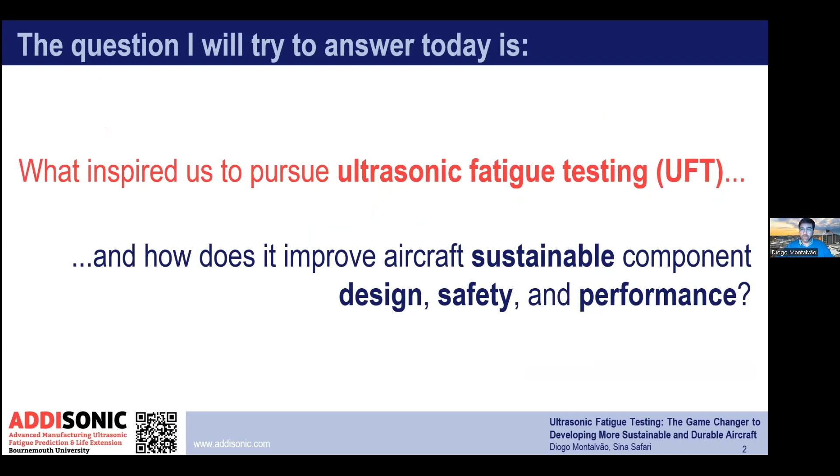So a little bit about me first. I think it's important that you know who I am. My name is Diogo Montalvão, as I said, and I work for Bournemouth University. I'm going to change here the pointer to a laser pointer to help me navigate the slides, as I don't have the same engagement with them as in a face-to-face session. I'm a fellow of the Institution of Mechanical Engineers and a fellow of the Institution of Engineering Designers. And I started my career in Portugal in a small company called Joca.

No one knows what it is, probably. I started there as a draftsman, doing engineering drawings, technical engineering drawings for hydraulic lifts basically. Then I went to Adtranz, which was bought by Bombardier Transportation, but I was working in the rolling stock industry, basically in maintenance of rail vehicles, reliability-centered maintenance of rail vehicles.

I was then invited to go to academia from a polytechnic, a small polytechnic in Portugal. And it was great because that gave me access to something I'm quite passionate about, which is airplanes. I did lots of consultancy work for the aeronautical industry, and I'm going to show in the next slide some of the stuff I did back then when I was at the Polytechnic.

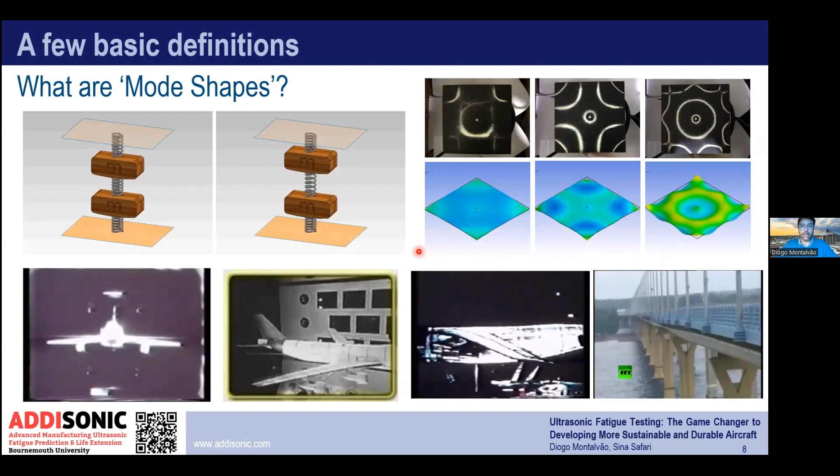So this is mode shapes. And now on the next one I've got a video of myself, which is quite embarrassing. Is it going to work? Why is it not? Is it because of the pointer? Let me see if I remove the pointer. Let's see what it shows.

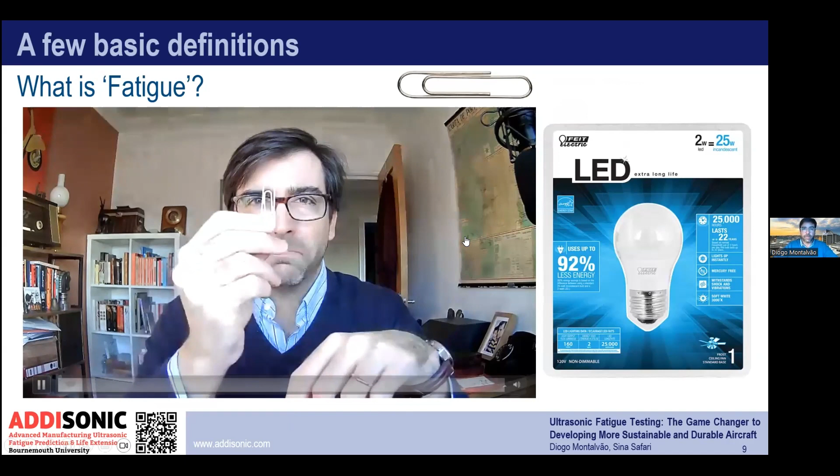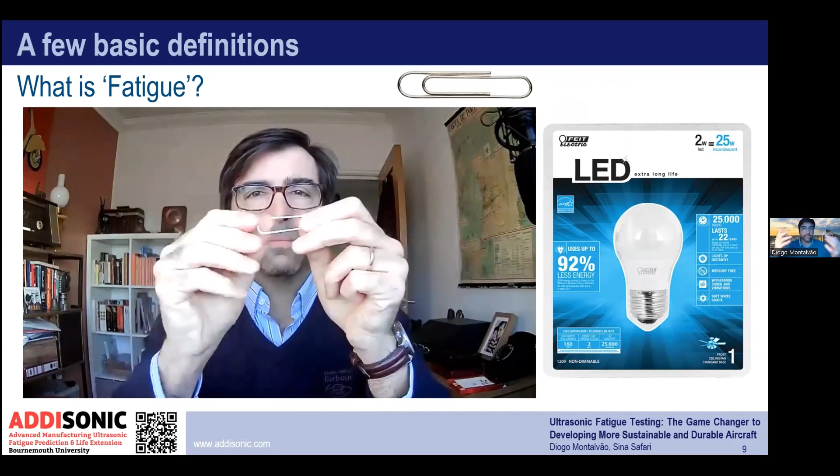So in that video I applied cyclic loading to a paper clip. You all probably know this already, but for those not familiar with the subject - for example, if you're from a background in telecommunications or electronics - you might not know what fatigue is. This is fatigue, specifically low cycle fatigue, what I just showed. It's in the plastic domain, but it's still fatigue. Information about fatigue is important, for example, because of planned obsolescence. Take a light bulb - we all know what that is, but they're designed to last, say, 25,000 hours or a certain number of on-off clicks. It will then eventually fail after that amount of operation. That's what fatigue is, and we use this information to design products for a given lifespan.

Now that we're done with the basic definitions - and again, apologies if they were too basic - let's move to the introduction to the topic. First, I'll apologize in advance if I use acronyms as if they're real words. There are two I might use a lot but will try to avoid: VHCF, meaning very high cycle fatigue, and UFT, meaning ultrasonic fatigue testing. The two are closely related because it's very difficult to test up to the very high cycle fatigue regime without ultrasonic fatigue testing.

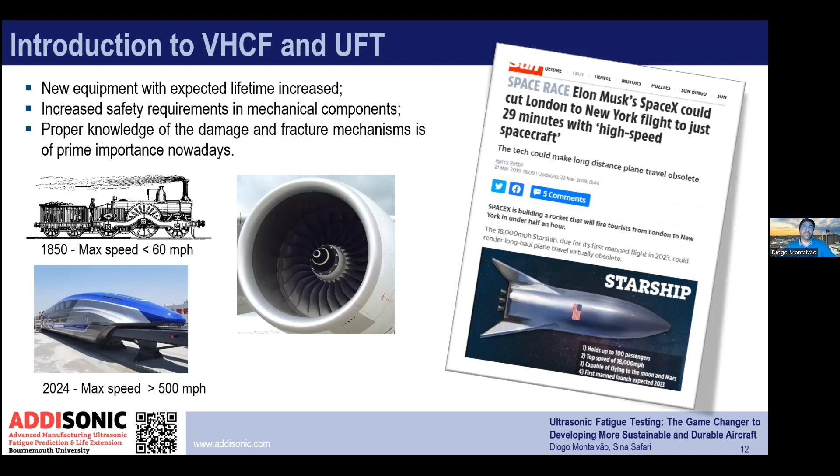And then we have Elon Musk's somewhat megalomaniac - maybe not, maybe yes - ideas of launching space rockets or spacecraft to travel from New York to London in just 29 minutes. This will be a lot more demanding on structures, and because of increased speed, we'll also have increased frequencies involved in the way loads change in a structure.

For those unfamiliar with the topic, if you bend a paper clip like this, each time I repeat this motion, that's one cycle. So I repeat it - 1, 2, 3 - and count the number of cycles until it breaks. As is obvious, the higher the stress amplitude, the lower the number of cycles to failure.

In the past, we used to say there was an endurance limit. If you know the books from, say, Peter Childs or Shigley, they would speak about designing for fatigue life - from 10 to the power 6 or 10 to the power 7, we consider there to be infinite life. However, that's an approximation, and there are factors of safety and correction factors in the design. But the point is there is no such thing, and that is now known as the fatigue limit - there is no such thing as infinite life.

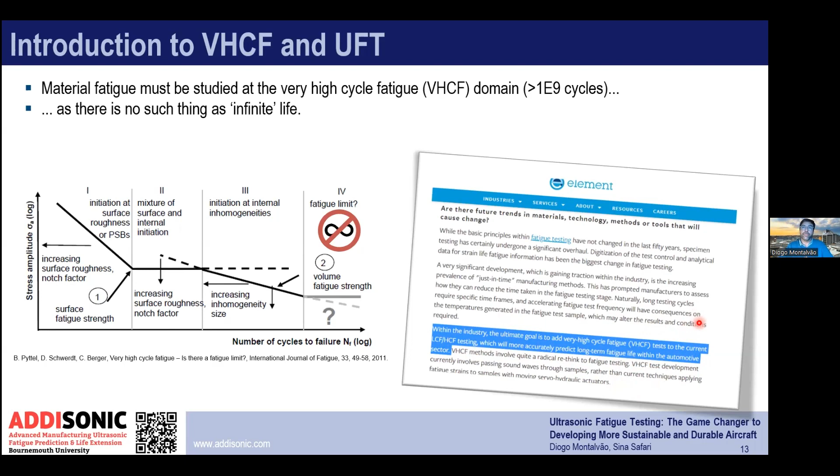This is actually from the automotive sector - I'm noticing the word automotive now, which is a bit annoying - but what I wanted to highlight is that within the industry, the ultimate goal is to add very high cycle fatigue tests to the current LCF (low cycle fatigue) / HCF (high cycle fatigue) testing, which will more accurately predict long-term fatigue life within the automotive sector and other sectors as well. So basically what we want to do is include this in the mix of testing we already use.

Other interesting things - this was from a PhD student I had, an excellent PhD student, who was working with other colleagues on a very exciting project on electromagnetic treatments on different metal alloys, including aluminium and nickel titanium. What he found was that we can improve or enhance some properties, namely resistance to cavitation erosion, resistance to wear, and hardness. Here we are comparing two materials: nickel aluminium bronze and a 2014 T6 aluminium alloy. There were also hints that with these treatments we could improve the fatigue lifetime, even when the parts are being serviced, so after service.

So they were operating, we apply the treatment, and then that brings back the lifetime. If we think in reliability terms, it's like reducing the failure rate, the chances to fail.

Now the problem was that we couldn't really determine that because there was just no time. It wasn't feasible to do the tests in a lab because a single specimen could take months to complete. So ultrasonic fatigue testing responds to that because it's accelerated testing.

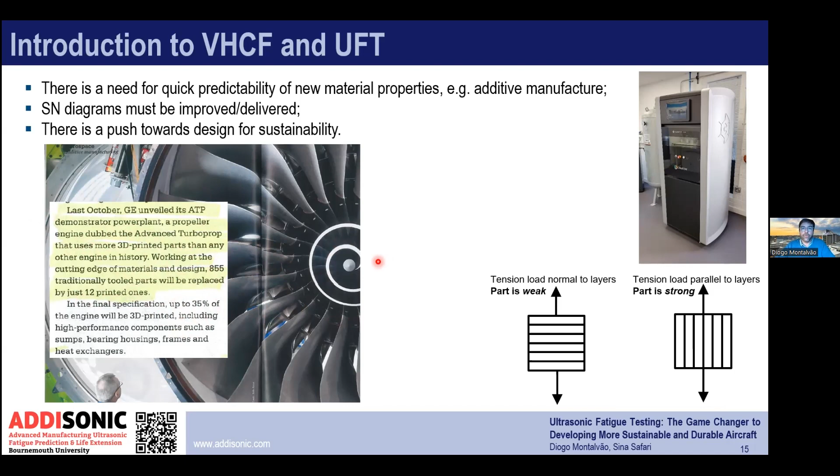So what is ultrasonic fatigue testing after all? Contrary to normal conventional fatigue testing, where you use a rotating fatigue machine that we clamp in both locations, or a universal testing machine where we apply tensile or compressive force, this one is a bit different. We use an actuator, which is actually something used for welding, and then what is called a booster.

But this is all based on reproducing free vibration working at natural frequency. So all these components are vibrating at their natural frequency - they're all designed to vibrate at natural frequency. And the connection points, like the one between the horn and the booster, and between the horn and the specimen, are vibrating in free-free conditions. That's the principle behind ultrasonic fatigue testing.

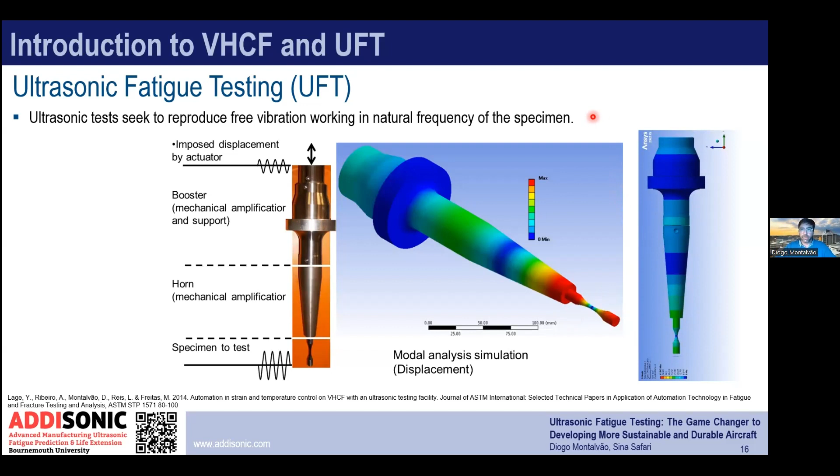There's a reason for that - the noise can be quite annoying. If we go below 20 kilohertz, we will hear it. Even myself, my hearing is now probably a bit damaged up to 17, 18 kilohertz - above that I don't hear a thing. But if we go below, it might be quite annoying, upsetting and disturbing. If we go above, we have problems with scalability of the specimens. So 20 kilohertz has been accepted as the standard frequency, and that's why it's 20 kilohertz.

This is the control diagram.

This is the first machine I developed, which is in the University of Lisbon, or I helped developing it. It was not just myself. I did all the control of that machine, where you can see the piezoelectric actuator, specimen over there, and an infrared thermometer. We were using some fans to cool down the specimen.

We used this cheap National Instruments data acquisition and control device. So we get the temperature and displacement measurement from a laser, a Polytec laser Doppler vibrometer. And we then do the control in LabVIEW. We can also obtain thermographic images.

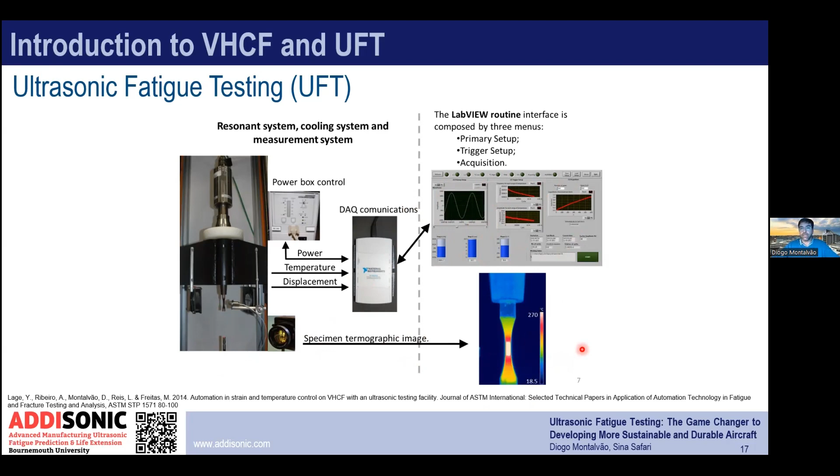This is used to tell us that if the temperature is increasing, then that's a sign that the stress is increasing as well. This technique generates a lot of heat, which is one of the downsides. But one advantage is if we compare a universal hydraulic test machine from Instron, that typically works between 1 to 50 hertz, and an ultrasonic fatigue testing machine that works at 20 kilohertz, you can see you don't have anything on this end, whereas here you need 2 clamps.

If we do the math, considering 30 hertz in this case, I placed a rotating bending, but it could be anything, compared to 20 kilohertz, to reach very high cycle fatigue regime, it takes us, in theory, half a day on the ultrasonic fatigue testing machine, and 1 year in rotating bending at 30 hertz for a single specimen working 24/7. This is not exactly true for the ultrasonic because of the heating. We need to stop, so it might take us a few days, maybe 3 or 4 days, until we get the crack.

But it still is a great improvement compared to a conventional test method. And if we wanted to reach 10 to the power of 10 cycles, it would take us 1 week on 20 kilohertz, working 24/7 non-stop. That would be 10 years basically, what we would get, because it's tenfolded the number of cycles.

So this opens up an opportunity to get data for very high cycle fatigue regime. Or if you want to look at it another way, if you're not interested in 10 to the power of 9 but in 10 to the power of 8 number of cycles, well, we can do that in just a couple of hours compared to months in rotating bending at 30 hertz. So you can get data very quickly in our testing.

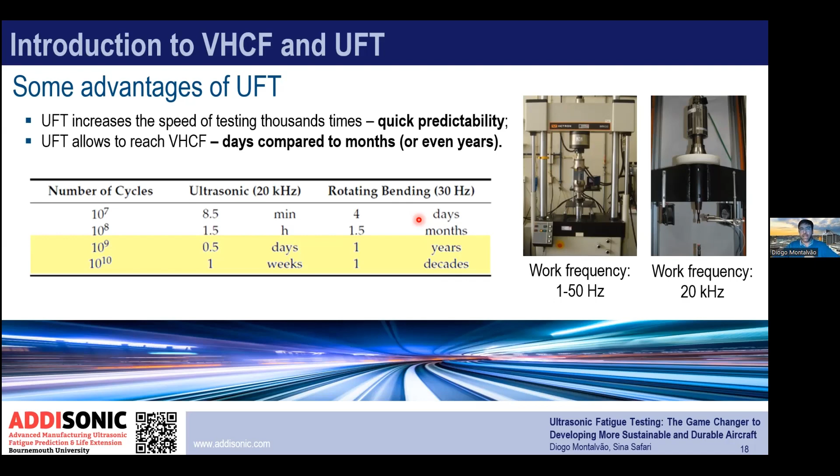Below 10 to the power 6, we don't want to use the ultrasonic fatigue testing machine, but then the conventional test methods are already giving us reasonable times to get the data. So that's fine. This is useful for quick predictability at high cycle fatigue, very high cycle fatigue. There are some challenges, I think.

Sina is going to talk about them. One of them is strain rate. You might be already thinking about that. Some materials are frequency dependent. I think he's going to touch base on that.

Temperature control, I already mentioned that, and it also has an effect in the behavior of the materials. The problem is, because of damping, when we start the measurement, the temperature will increase, so we need to stop. We need to specify an upper limit, then cool down the specimen and start again, and stop, and so on and so forth. So it's not continuous. This also brings other questions: will that have an influence on the results? Because we all know that when we turn on and off something in control systems, there is an overshoot. Well, it's a price to pay for the technique.

So obviously there are limitations, we don't want to hide them. Data acquisition, that's no longer really a limitation or challenge. I left it there because this technique exists since the 60s. However, because in the 60s there was no capacity to acquire data, it kind of was waiting for data acquisition technology to evolve. And so in the last 10 to 20 years, this is when the community started getting interest in ultrasonic fatigue testing.

Low cycle fatigue, well, that's a challenge, but we can do it in conventional testing, that's not a problem. Scalability as well, and how it compares, because of frequency-dependent materials, with normal testing. This is taken from a paper where they could see there were some differences between the SN curves obtained in ultrasonic fatigue testing and obtained in rotary bending. But there are ways of calibrating the two curves, and from the ultrasonic data, converting it into the equivalent lower speed version. So that's something interesting to know. Some materials are more frequency dependent than others.

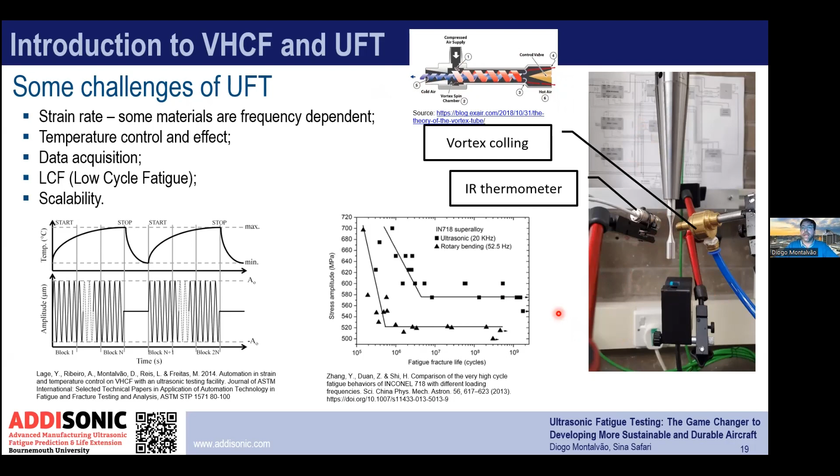And this is a laser that measures the displacement at the tip of the specimen so that we can relate it to the stress at the center. But we've got digital image correlation, which Sina is going to talk about, that allows us to measure at very high speed the actual stress in the specimen.

Other advantages of ultrasonic fatigue testing is that it is highly versatile. Because it is modal-based, we can do multi-axial testing with a single actuator, as long as the specimen is designed to allow us that. This is an in-plane biaxial specimen.

I claim to be the first person in the world to basically tune a specimen that exists. So I picked up a specimen that existed for conventional testing, and I tuned it to use in an ultrasonic fatigue testing machine.

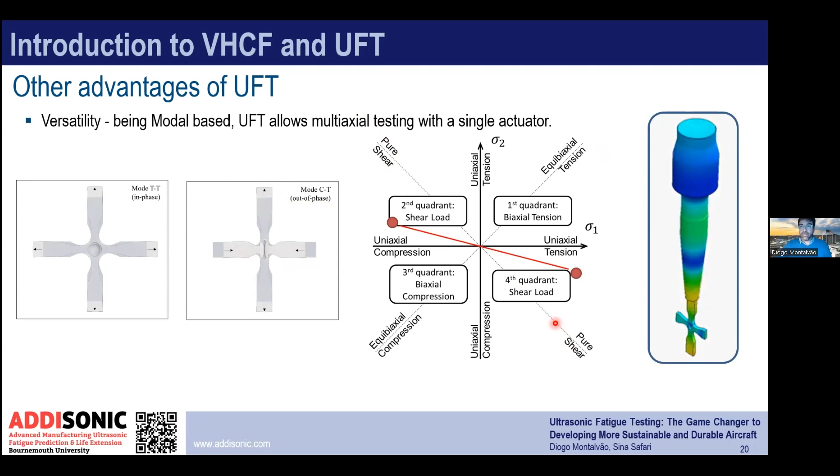And we can do loads of stuff with the same machine. We can have in-phase, or pure equibiaxial testing. We can have out-of-phase mode shape, so when this arm is in compression, the other is in tension and vice versa, which is basically pure shear. We can also get different biaxiality ratios, which is what we're showing in that picture. So I thought it would be interesting to talk a little bit about biaxial fatigue so I can explain what this is.

This is relevant because multi-axial stresses are what actually occur in real structures. There's no such thing as purely uniaxial stress - well, that's not entirely true, we might have uniaxial stress. But even a uniaxial specimen is biaxial if you think about it, because of the Poisson ratio. So if I have steel, for example, and the stress in one direction is, say, 10, the stress in the other direction will be around 3 megapascals or whatever the unit is. So biaxial stresses are really what's happening in real life.

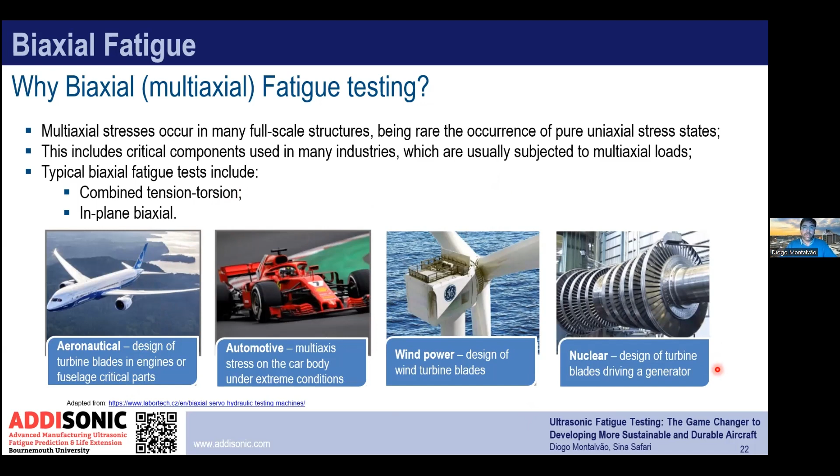And this includes critical components used in many industries. Here I've got examples that I got from elsewhere - I've got the link there. We have many different examples where this could be critical, especially in turbine blades, nuclear generators, and even fusion reactors. So this could be quite relevant.

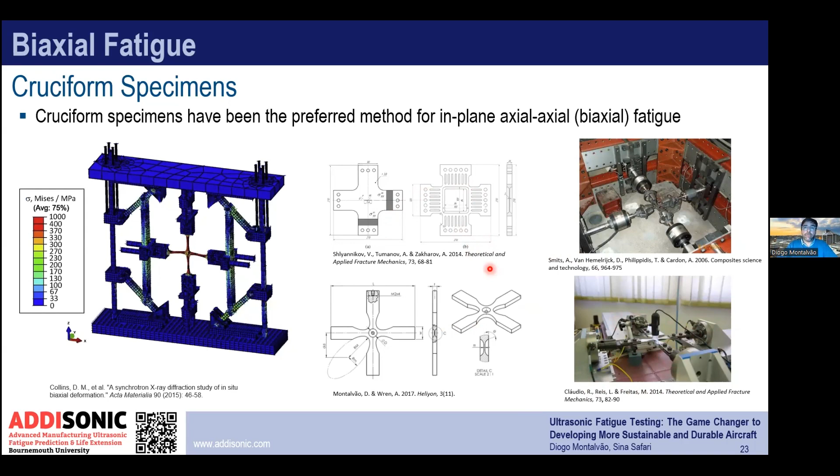And then we have different types of specimens here in the middle. Now, the problem with that is complexity, but with the ultrasonic fatigue testing machine - the same one used for uniaxial specimens - we can still do the biaxial ones as well.

So here we've got cruciform specimens, again the same picture I showed you earlier. And here's the schematic of the machine again - piezoelectric actuator at the top, the booster, the horn, and then the specimen. But because the specimen is connected through an antinode of vibration of that particular mode shape, it will vibrate with that mode shape. If you know about vibration theory, this should make sense. So the coupling is at the correct coordinates, and I will get the mode shape I designed for, as long as this is an antinode of vibration.

We can change the arm's length, by the way, and get different biaxiality ratios between the two axes. And the good thing is that only one actuator is needed.

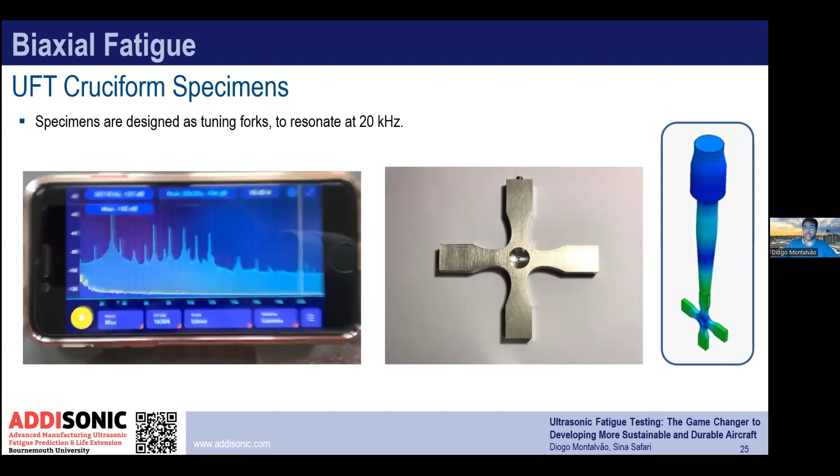The specimen was designed in a computer using finite element analysis, then we made it using subtractive manufacturing in a CNC machine. This one is aluminum, and we tested it to check if it was resonating at 20 kilohertz, and then we can place it in the machine safely and test it to fatigue.

There are obviously some problems, and here is a specimen that didn't work really well - we had heating being generated at the top, and some problems with the mode shapes, with a spurious peak over there. So we need to make adjustments to the design because we want a pure harmonic signal. Once that's done, we can see we're getting good data.

The maximum stress is at the center, and in this case the fracture was around 45 degrees, which for this pure shear specimen is exactly what we expect to get from theory.

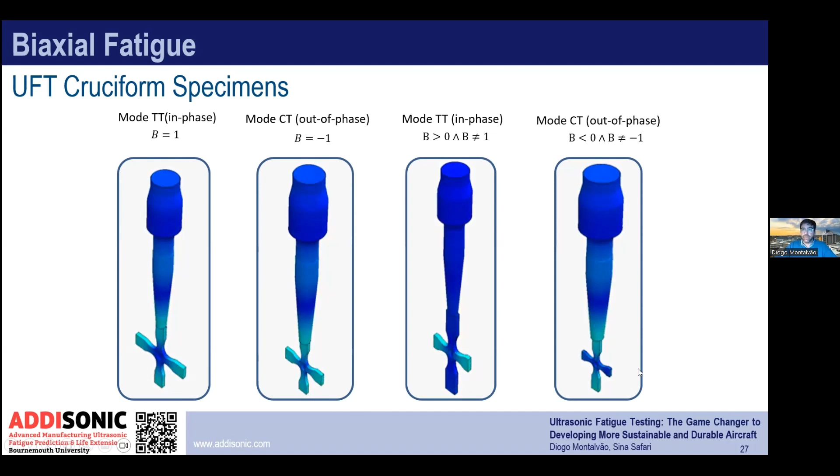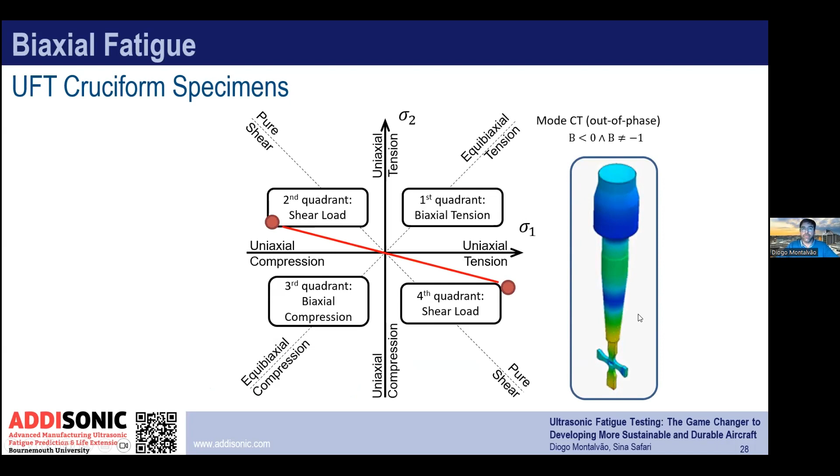So again, this is basically what I showed earlier, so this is maybe a repetition of the two stresses. In this case, we would get somewhere over there - that's more or less what we've got.

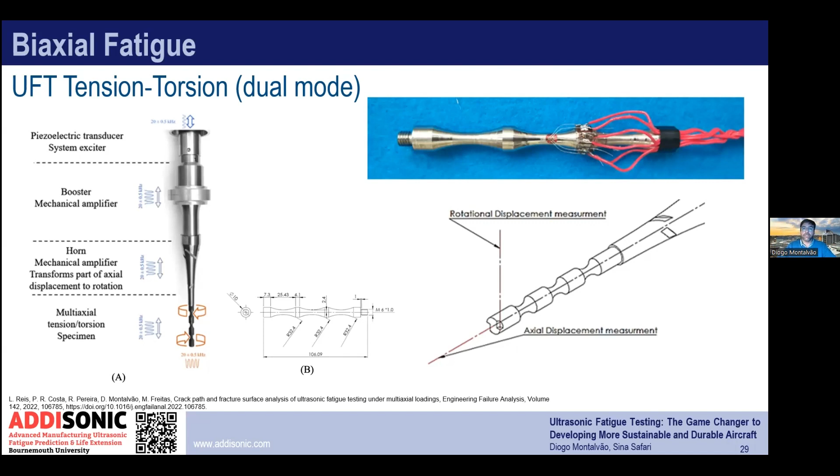But it has interesting applications, like gears - bevel gears, or helical springs. So there are many different types of applications where this could be interesting to test.

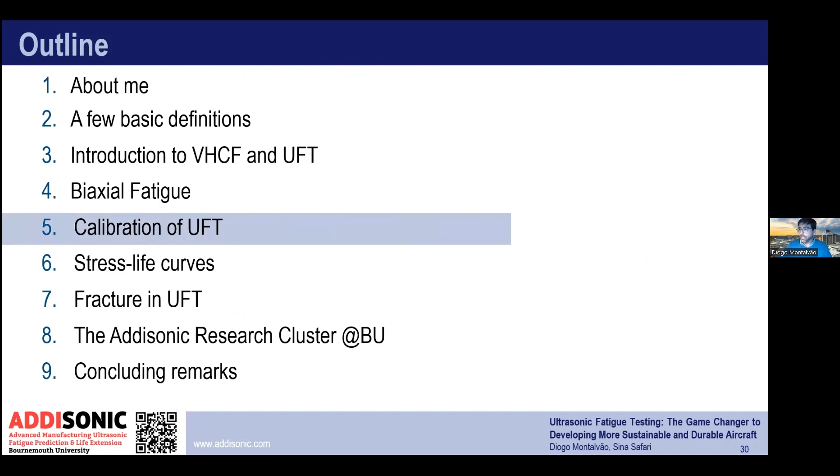So we reached the stage where we're going to talk a little bit about the calibration of our ultrasonic fatigue testing machine at Bournemouth University in the ADDISONIC. Sina, this is where you can say a few words and let me know when to change the slides.

Hello everyone, my name is Sina Safari. I'm a postdoctoral researcher working with Diogo in this interesting project in the ADDISONIC research cluster. I'm going to briefly describe how we are doing the test in the lab and how we collect the data and process them.

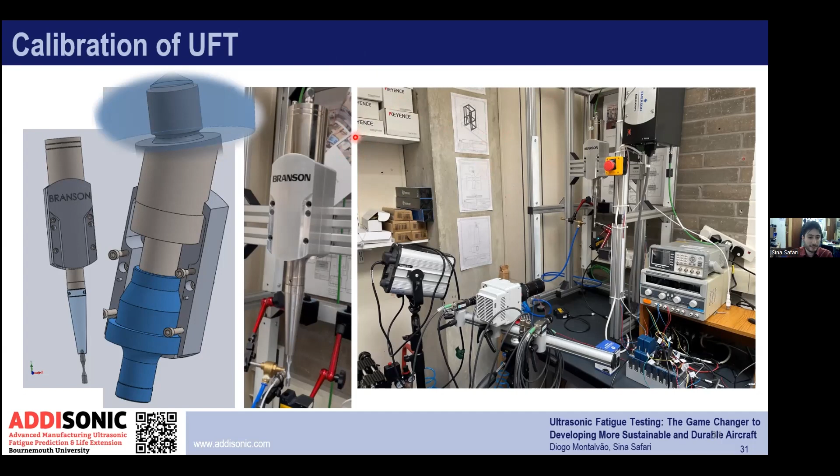Basically in that high frequency range, if we have friction, which is a nonlinearity, it can cause some mode shapes. But we could kind of control them properly to do the tests.

So this is the setup we have in the lab, and I'm in the same lab at the moment. In this slide, I'm going to talk about some standard procedure to do the calibration of the machine and how we can extract the data.

At the moment, I think there is one standard, a Japanese standard, which is very brief and the first one in the world, talking about ultrasonic fatigue testing, specifically on metallic materials.

So there are a couple of steps to go through. First of all, we need to calibrate and validate the laser reading at the tip of the specimen. Then we should also calibrate and validate if the DIC system, digital image correlation system, is working.

After we make sure they are showing correct results, we need to make sure the intended mode shape is excited, which means, as you can see in this animation, we need to make sure that the top plate of the specimen and the one down there are working synchronously and as designed, intended.

So we can put another laser, or we can use the DIC system to just observe the vibration mode, and we can make sure it's exactly what's happening in the simulation - that it's happening in the physical world. So that's the second step.

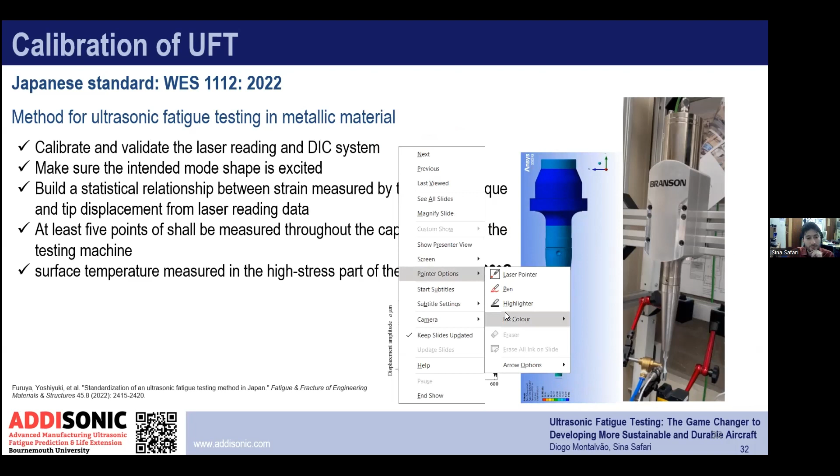In the third step, we can build a statistical relationship between the strain measured - what I mean by strain, we have this neck in the middle of the specimen, which we measure using the DIC system. And then using the laser, we measure the tip displacement.

So there is a relationship, because we are assuming the specimen is in the linear regime - there is a linear relationship between the tip displacement and the strain in the middle of the specimen. That's one of the steps we need to carry out to find the relationship between the laser reading at the tip and the strain in the middle section of the specimen.

At least we need 5 points, which I'm going to show in the next slide hopefully, to do this process, measured throughout the capacity range of the testing machine.

And then finally, we need to always control the surface temperature in the high stress part of the specimen. As specified by the Japanese standard, it should be lower than 30 centigrade. It's just a guideline, so sometimes we can go over it, depending on the material as well. This figure here is just showing how the test is working.

We just excite the machine and it starts vibrating at 20 kHz. Then the cooling system starts and the machine stops vibrating. As you can see, we have a very quick free decay response, and the vibration dies down and the cooling system works, and then after cooling it just starts again.

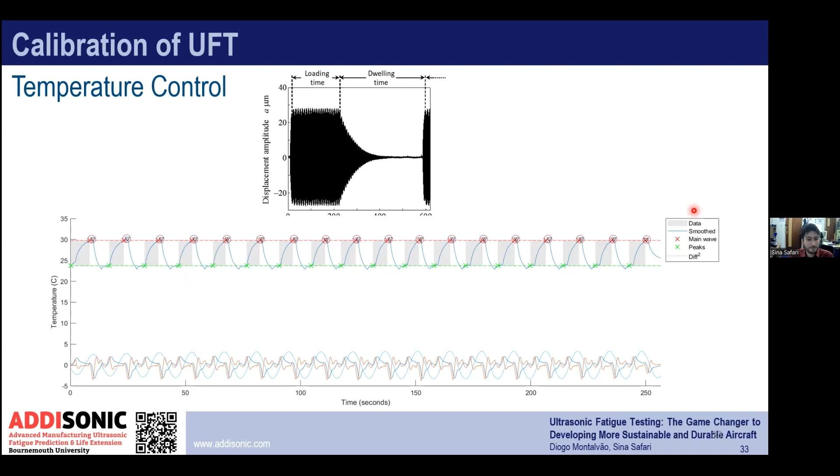So from the temperature also we can calculate the number of cycles. That might not be quite reliable, but it's a good approximation. We have a real-time counting system in the control part of the testing machine that counts the number of cycles for us. So in the next slide, we move on.

This slide shows exactly how we measure the strain in the middle section of the specimen using the DIC system. So if we play that and also play the one at the bottom, as you can see, we have the simulation of vibration, and that shows the stress, or strain, in the middle. Both of them should be similar.

We can compare them because it's in the linear regime. So it shows the strain, for example, in the middle of the specimen using simulation, and what we are observing in the experiment using the DIC system. The wave down there, the cyclic motion, shows us the strain in the middle section. This is how we use the simulation and experimental data to calibrate, to make sure the machine is working as designed, and also to calibrate the FE model based on what we observe in the experiment for later stages.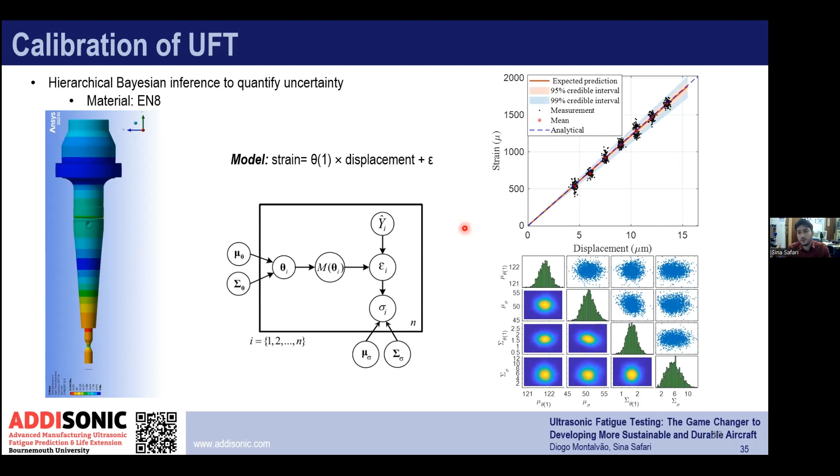So we used a hierarchy of Bayesian inference. I'm not going to elaborate too much on the algorithm, but it just means that if you have multiple data sets, not just one, you can use a hierarchy of regression to find out the uncertainty in the data and distribute it. That's the whole process.

So when we built that relationship, now we have the tip displacement and strain. Now we can go and find out the number of cycles for that strain or stress level. For example, I'm going to excite this structure, or the machine, at a tip displacement of 10 microns. That represents, based on this bottom left graph, a strain higher than 1,000 microstrain.

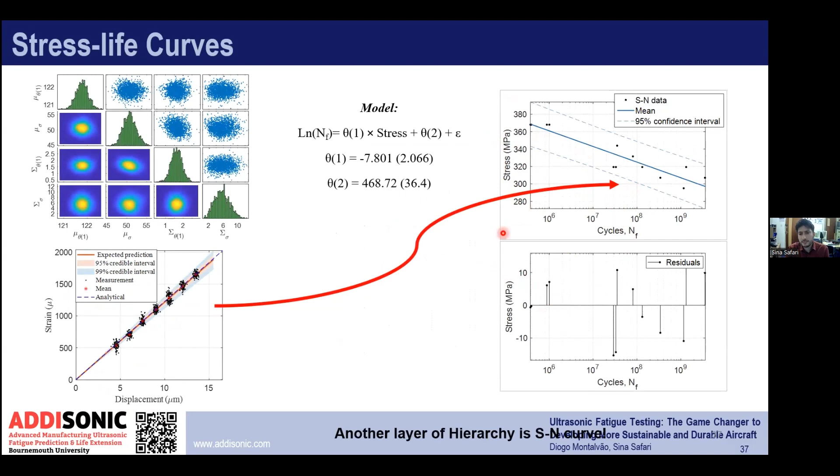And then I can build the relationship between the strain and the number of cycles. So these are the data points based on recommendation. 12 specimens we just broke for the very high cycle regime, and we had some data for the low cycle regime as well.

As you can see, we can fit these data again using regression or a simple model, and we can find out the trend with some confidence interval. Take into account that this very high cycle fatigue regime with normal machines will take, as Diogo mentioned, up to 1 billion cycles. It will take 1 year to do just one specimen. But with this machine, it's achievable with just 12 specimens. We can find out these data points and build this stress-cycle, number-cycle curve.

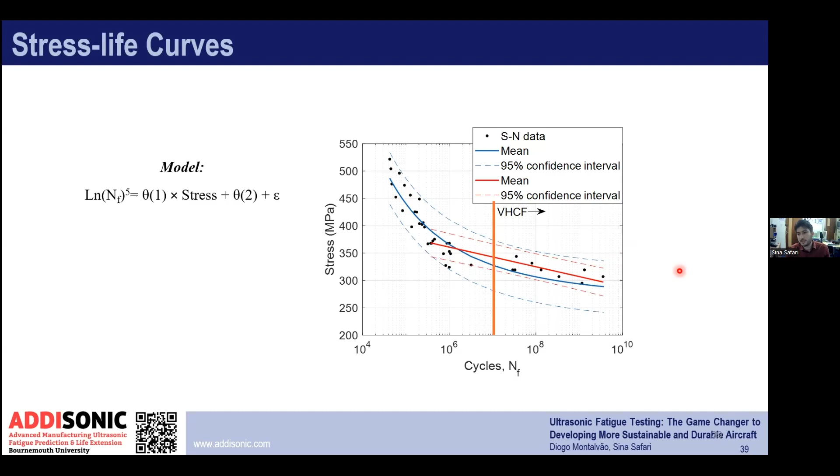If we move on to the next slide, this again shows different fitting methods for different models we can use. In the very high cycle fatigue regime, I use the linear model, or I put the whole data together and use the nonlinear model. There is a reason for this: some literature proposes that if we continue the regime we observe in the low cycle to the high cycle and very high cycle, we will not get a good estimation of the S-N curve.

So this graph shows 3 regimes. Regime 1 is low cycle fatigue, and as you can see in regime 1 we have elastoplastic behavior, with dominant plasticity there. In the second regime, the transition between low and high cycle regime, we have a little bit of plasticity involved in the microstructure. And in the third regime, the very high cycle fatigue regime, the system is almost linear.

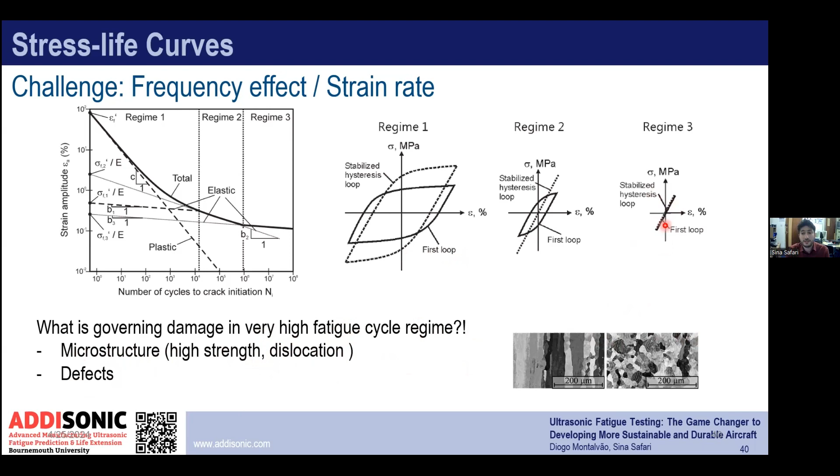So the question of where the damage is coming from actually comes from the microstructure. What is governing the damage in the very high cycle regime, I would like to answer, is the microstructure. If there is a very small microstructure defect, or after many cycles, if there is microplasticity developing in some region of the structure, in this very high cycle fatigue regime the microstructure is very important, and this is one of the challenges that should be addressed.

Okay, I think that was my part, Diogo. Thank you very much, Sina. I'm conscious of time, I need to speed up a little bit.

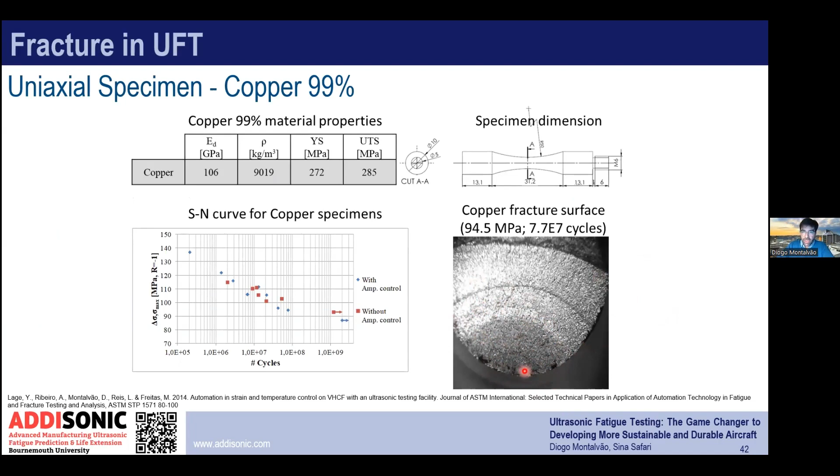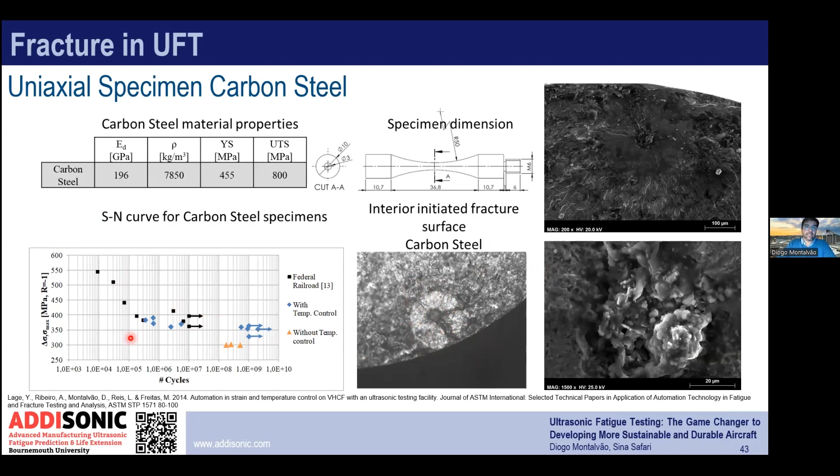You already covered most of the stuff in terms of fracture, so I won't go into details. These are results from past tests we did in copper, and we can see the typical beach marks in fatigue in a uniaxial specimen, with the crack developed from a surface defect. However, with steel, coming back to what Sina was saying about the microstructure, at very high cycle fatigue regime the crack nucleates from inclusions or defects inside instead of surface scratches, in what we call a fisheye pattern. This is very typical in a steel specimen, but the data is still comparable to the carbon steel specimen.

In biaxial fatigue, without going into much detail, there are 3 types of modes in fracture mechanics. What we see is that with equibiaxial loading, stretching from 2 orthogonal directions, we get mode 1 striations, meaning we're getting opening as expected, although the angle wasn't quite right at the center. We can see it very well, it's 53 degrees, not too bad, we were looking for 45 degrees.

In pure shear, we got 40 degrees at the center of the fracture, and we have shear marks, which is mode 2 as expected, and then there is a bifurcation, which has been observed by other researchers before in aluminium.

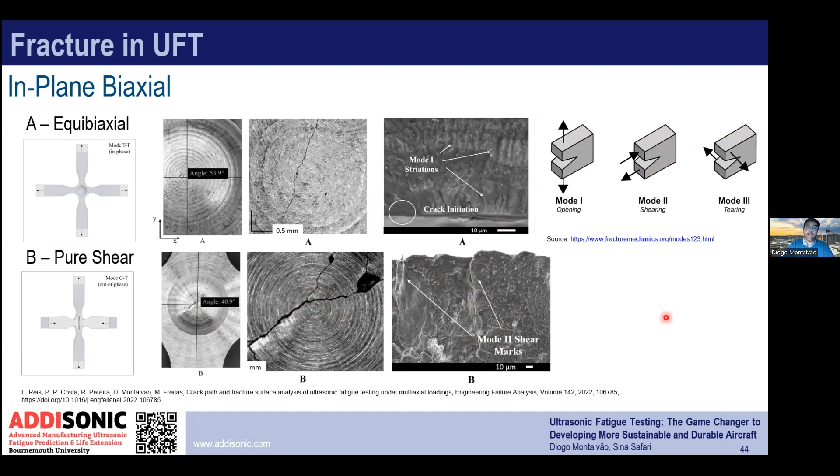So just to finalize a bit about the ADDISONIC Research Cluster, it's funded by Research England with at the moment 265,000 plus pounds, and has a mission to contribute to reducing global waste, enhance the optimization of engineering systems by helping engineers incorporate advanced materials tested under ultrasonic fatigue, for quick and reliable predictability of properties to extend their lives and enhance design for manufacturing.

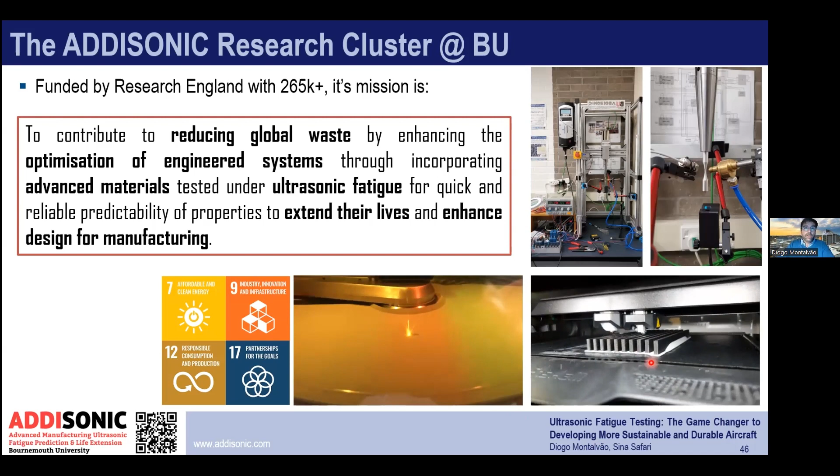These videos show 3D printing at the university, of metals and carbon fiber specimens as well. So I had a video here.

I'm not sure this is going to work, yeah, I'm conscious of time, I'm going to probably skip this.

This was just to show the digital image correlation showing the deformation of the specimen, and that's the camera over there, then comparing with the finite element model.

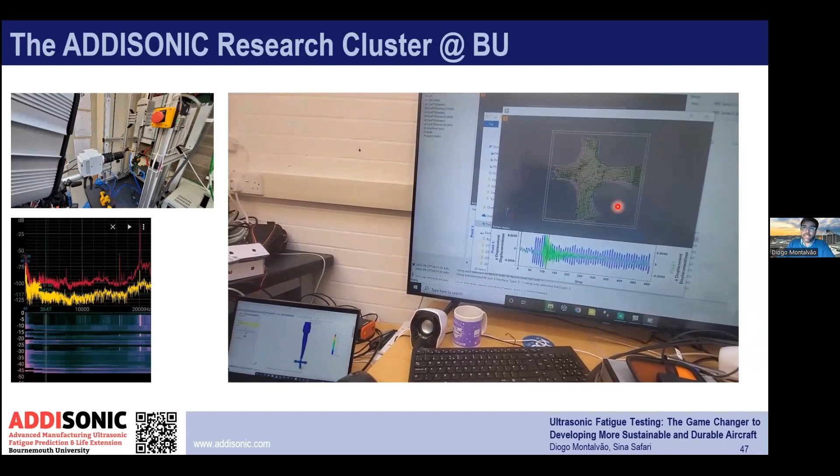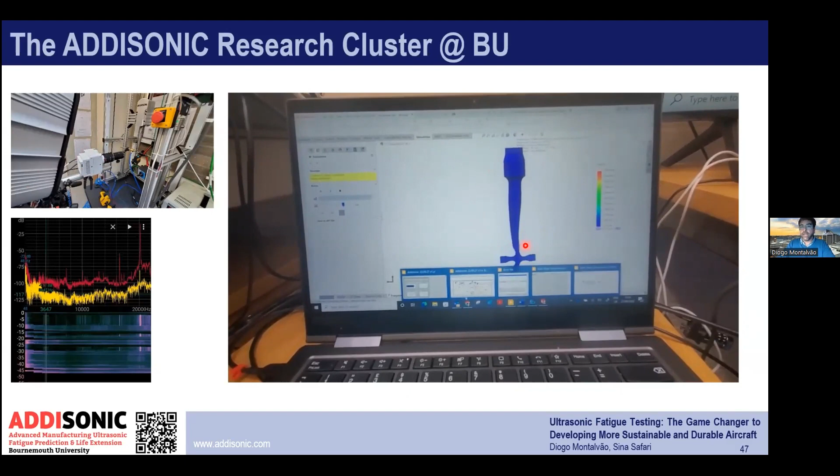Oh, actually it's now running. This wasn't intended, this was a specimen with a problem, but we can see that the specimen did have, it's hard to see anything, but the camera is picking it up, and this is the simulation, and we are trying to determine what the issue was with the mode shape.

So, concluding remarks: we need new technologies for the qualification of aeronautical parts and to predict how long they will last. This is critical, we are still not at the TRL, technology readiness level, that we could do that when we are in university, but obviously industries would feel free to explore that.

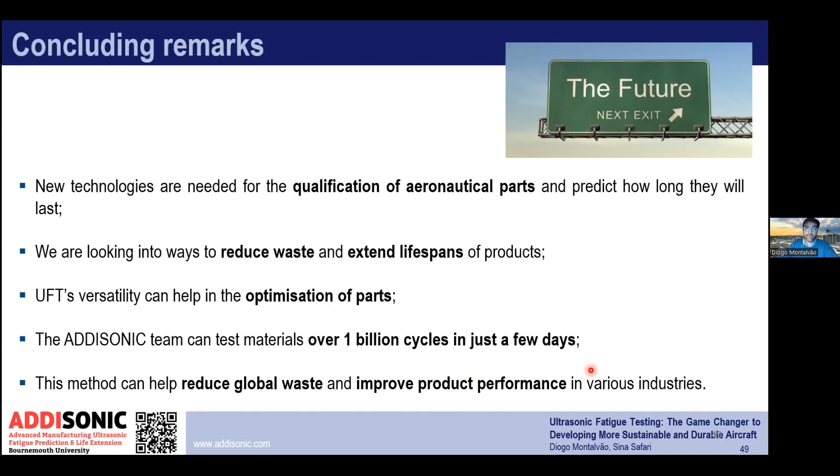We are looking into ways to reduce waste and extend the lifespan of products, and ultrasonic fatigue testing is helping with that, combined with, for example, the electromagnetic treatments that I showed earlier. It's very versatile because we can test different stresses, combinations of stresses, and it helps in the optimization of design of parts. We can test materials over 1 billion cycles in just a few days, which can help reduce global waste and improve product performance in various industries because it gives us loads of data in a very quick fashion.

So that's it basically, I think I managed to meet the 8:30 time. That's it, I don't know if you have any questions, I'd be more than happy to try and answer them. If they're too hard I'm not sure I'll be able to, but thank you very much for watching.

Thank you very much, Diogo. I'm going to stop the recording and then we can ask questions. I will try to ask questions.